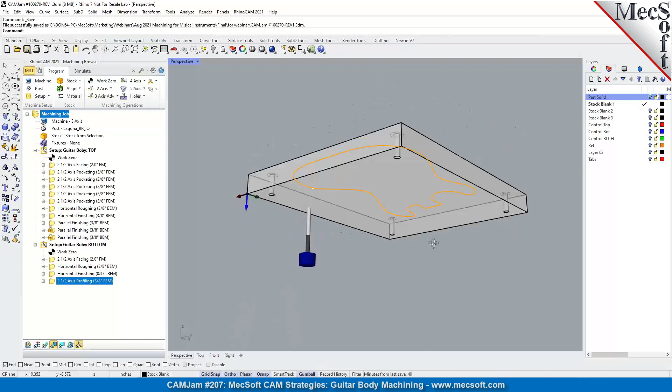So obviously we have a stock blank that doesn't have, it's just a square blank, and obviously doing it this way, you're gonna be using up all of that stock, and you might want to use that stock for something else. So, of course, you would save it, but this is just one way to do it.

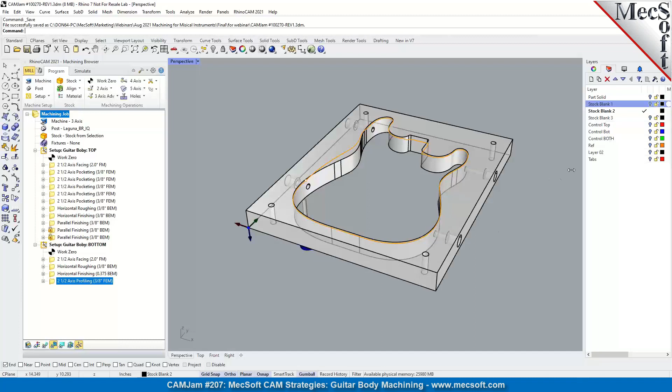With the locating pins diagonally to flip the part from top to bottom, this is just another way you could do it. If you just want to machine the blanks and locate the blank, you can use a frame type fixture to insert your blank, position it, and turn on your vacuum board. Then you can pop this frame up and you're ready to go. And then also, obviously, just a blank of the guitar body itself.

Okay, so let's get these parts turned back on here so we can start talking about the control geometry. So basically on the left, we got two setups. We got the setup for the top and a setup for the bottom.

So for the top setup, we're starting out with a facing operation. So basically for facing, if we go and look at this from a multiple viewport layout, the facing operation uses there's a contour perimeter curve around the guitar body. This is the exact shape of the guitar.

We'll be using this for finishing, and also for side 2, we're going to be using this for your profiling to actually complete the machining and separate. If you're using a square blank, it'll release the guitar body from the blank. That's our last operation on side 2.

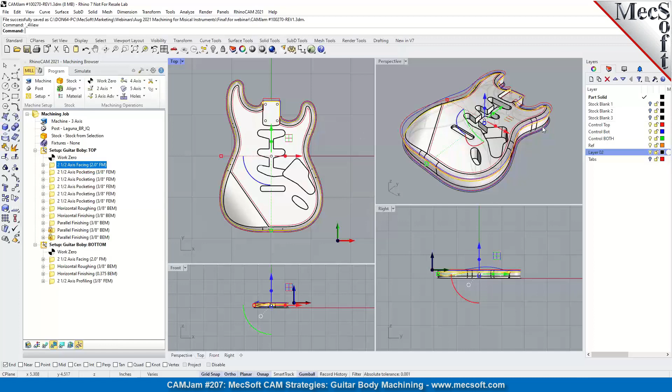Let's go ahead to look at some of the pocketing operations. Can you turn on the toolpath? Yeah, so we can see the toolpath. So there's our facing.

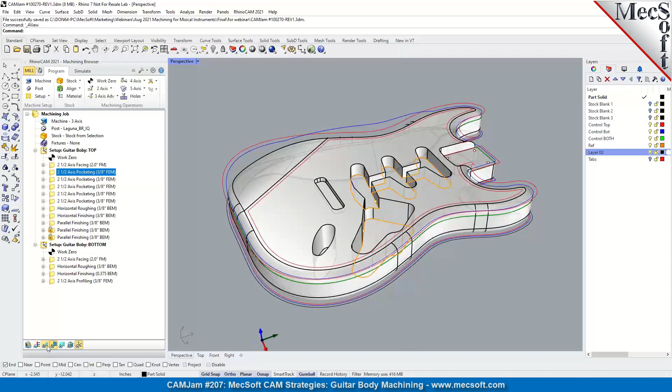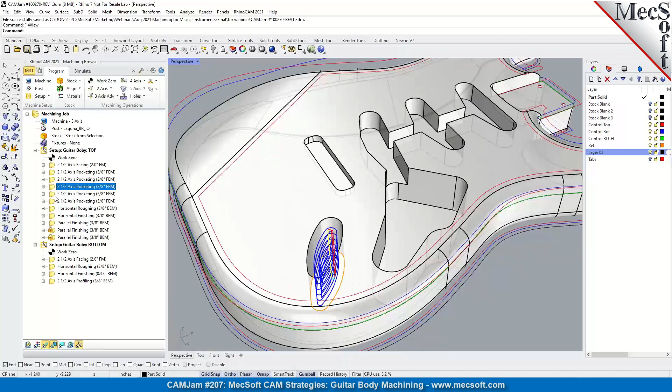Let's go ahead, we got a number of pocketing operations that use flat areas at the bottom of the pockets as the control geometry. And then some more pockets here, different levels of pockets. Another pocket here and here. And obviously the neck pocket there.

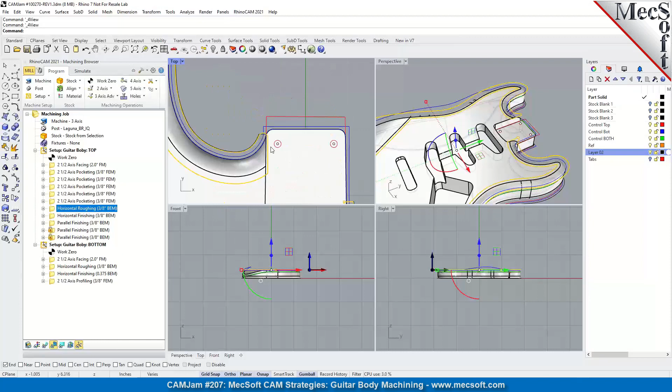Now roughing. Basically, you would use these two contours right here for the roughing operation. So it's just going to rough between these two areas right here. So the roughing the perimeter fillets, and also this contoured area here, and also around filleting around this edge.

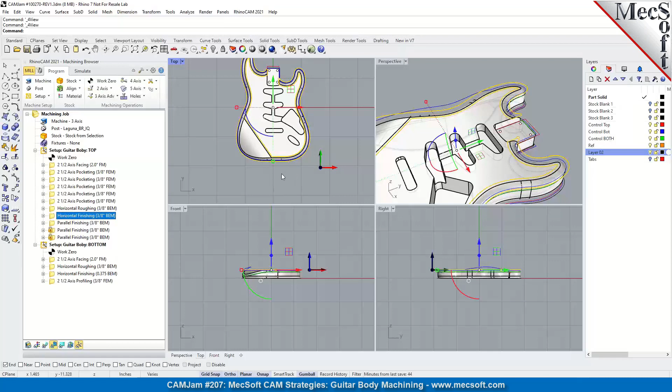So Don, there was a question about how did we create these boundaries? Okay, so let's just look at the control boundaries for the top. Basically, what we have here is the way to create these is a number of different ways. Obviously, you're going to use your part geometry, and Rhino has many different curve creation commands. You can create a silhouette around the part or a contour around the part to create a curve, and then that curve is either offset outward or offset inward to create a region between the two.

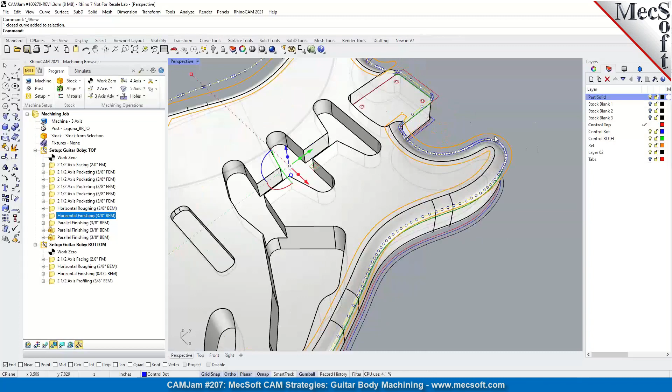So we're using a number of offset curves. Here's the perimeter curve, and then we're offsetting that outward on this side and on the inside as well. And there may be areas where you're going to have to tie it off to form a closed loop, because you do have to have a closed loop if you're going to contain your 3-axis operations. It has to be closed. So we tie it off on this end and just tie it off on that end.

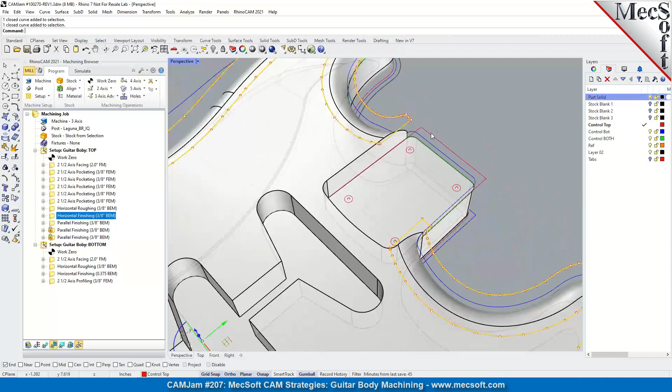So I guess the message to our listeners is that once you get the model of your 3D model of your guitar body, there is some additional construction you'll have to go through and create these boundaries to contain your machining, so you can do that in a very optimized manner, as Don is showing here.

Yeah, so you don't want to machine everything. If you don't have to machine everything, you don't want to remachine what you've already machined. So the control geometry is going to help guide the cutter to machine only the areas that are pertinent to that particular operation.

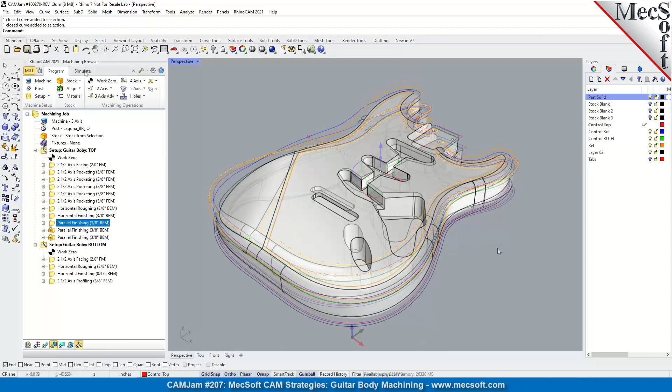For finishing, basically, we're using the same control boundaries here, where we're finishing just the fillet and the fillet on this side, and then this contour area here. So we got basically facing, a number of pocketing, a couple of roughing operations, and a parallel finishing operation. If you recall, I talked about the stock blanks.

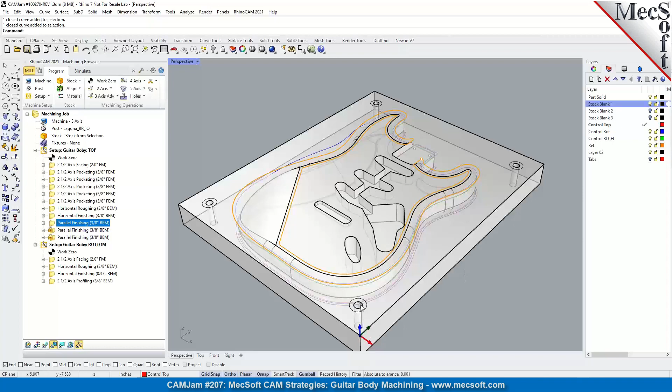This is sitting in a square blank that's already been machined. It's been squared up. It's got locating holes in the corners, and basically you only use two of the locating pins. You set up the one side. You can have a work zero. That work zero can be at the top, upper and outer quadrant of the stock, or at the bottom.

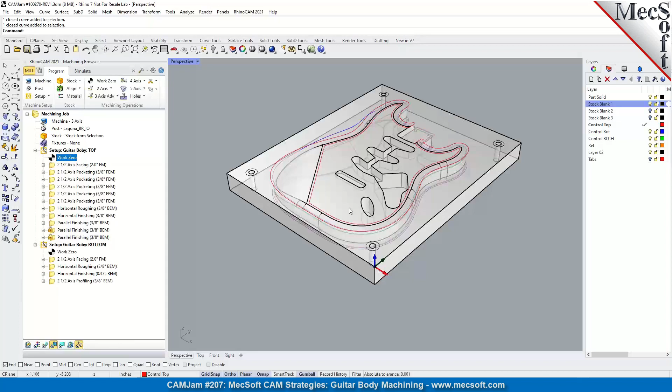Either way, it'll work. And the thing is about these two diagonal pins is that you set this up for the top side and set your machine zero. Then when you're done with that side, all you got to do is flip it over this way and machine the bottom. So let's go ahead and just flip that over. You'll see what I'm talking about.

So you just flip that over, and then for the bottom you'll use the same setup. You don't even have to set the machine zero again. It's the same location.

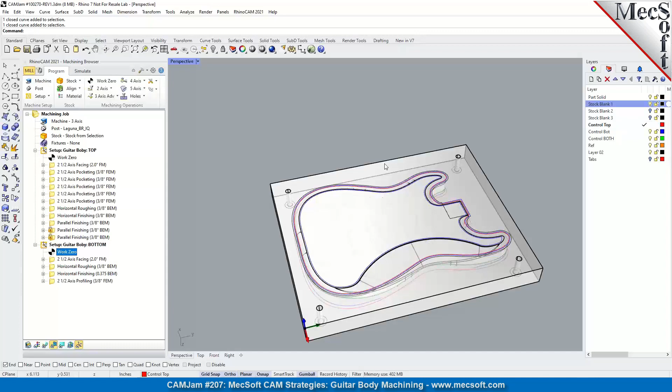Hey Don, before you jump into that, there was a question on those two locked operations you have. It might be a good segue into describing the functionality of locking operations. Yeah, okay, that's a good point.

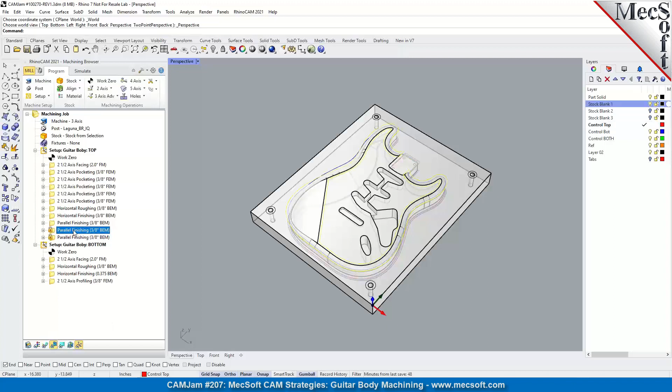Basically, you see the little lock on the operation. These are alternate methods of finishing that I used. Let's go ahead and turn this off, unsuppress it.

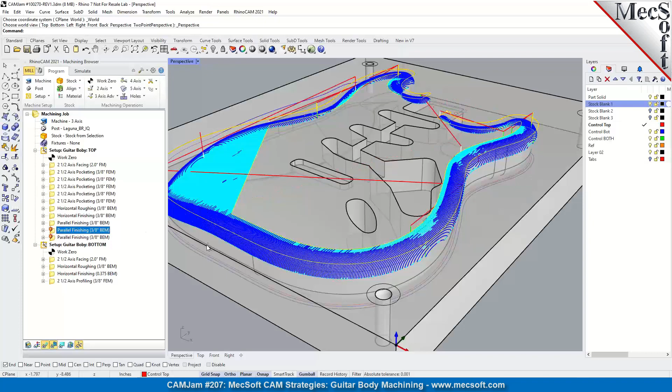There is one of the finishing operations I used for the top. It is a parallel finishing operation, and then also a second finishing. Let's unsuppress that. So basically these two finishings go in opposite directions along the X, and then also along the Y at 90 degrees to get maximum coverage for your surface finish.

The idea of these locked operations is that, like Don mentioned, these could be alternative ways of machining that you want to keep around for later use, or maybe even looking at it and using it later. But maybe you don't want to post these out. So if you select post all from the machining job, these locked operations will not be posted out, nor would they be simulated. They're basically there as archived operations that you can open up later and do whatever you want with them. Pretty nice functionality based on some of your user input.

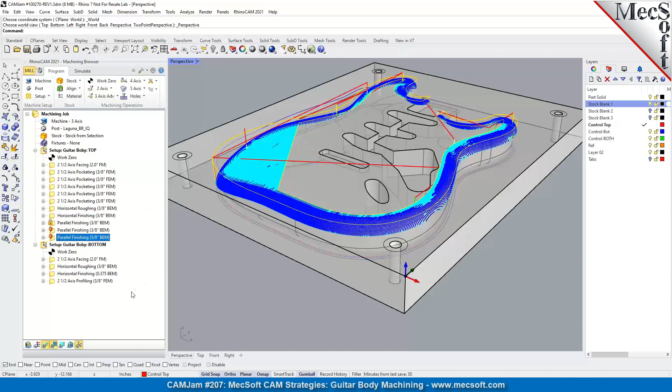Yep, and it's going to come in handy right now, because since I messed up my first finishing, I'm going to lock that and leave these other two turned on. I'm not going to generate them right now, but okay. So that is set up for the top.

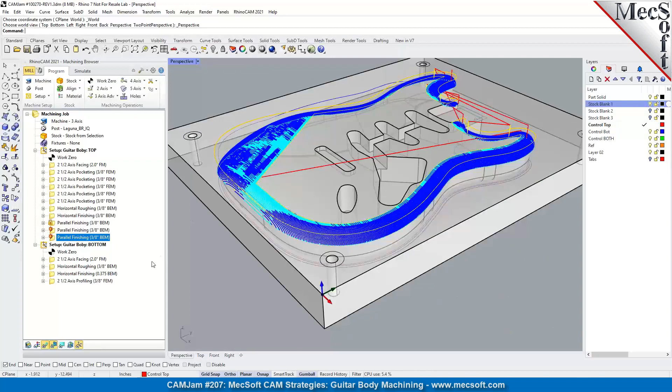Now, because you're using a square blank with diagonal locator pins, and the guitar body is in the center of the block, basically all you need to do is flip the part over, and we're going to go ahead and do that. Flip it over. And let's go ahead and turn this blank off.

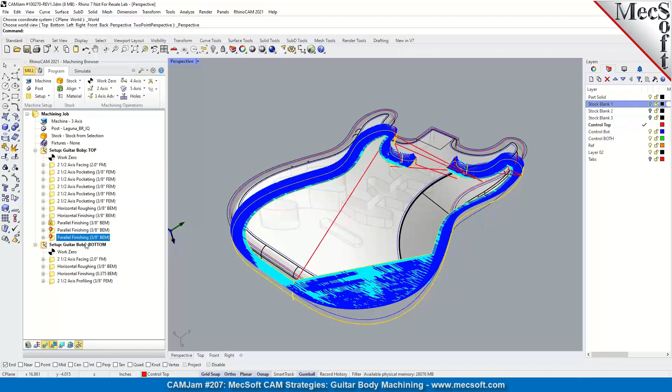When Don says flip the part over, he's really not physically flipping it. He's not doing a transformation of the part. All he's doing is rotating the view. In our CAM system, we can do a setup which basically reorients the tool axis as if you physically flip the part and machined from the other direction.

So it's pretty handy. This is available only in our Pro and Premium configurations, and also the 3+2 add-on module. If you wanted to add that, you would be able to get the additional setups and the ability to actually do flip machining. We actually did a webinar on that, I believe, two months ago. Yep, and if you're interested, you can view that on our YouTube channel.

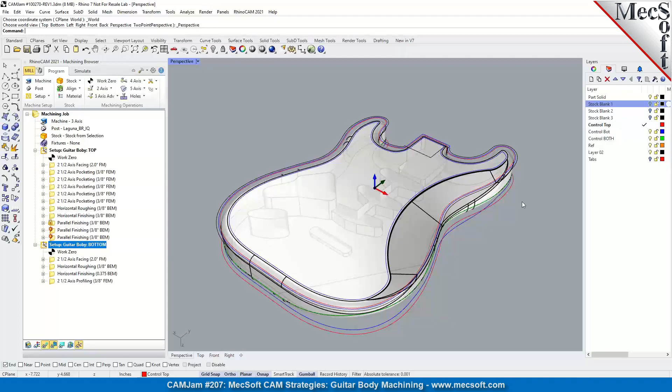Thanks, when I was talking about flipping, I was talking about the physical flipping of the stock blank on the table using the locator pins. Yeah, that is on the machine. I'm talking here on the CAD system, in Rhino. You're not physically flipping it. Exactly, you're just machining it from the other side, but on your machine, you're going to physically flip your stock.

And that's a good feature of the Pro configuration. If you only had the standard, then you would have to have separate CAD files for the top and for the bottom, and that can introduce a lot of inaccuracies from using two different part files, etc.

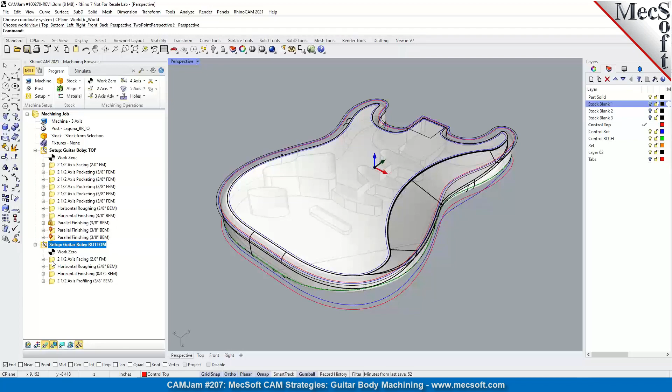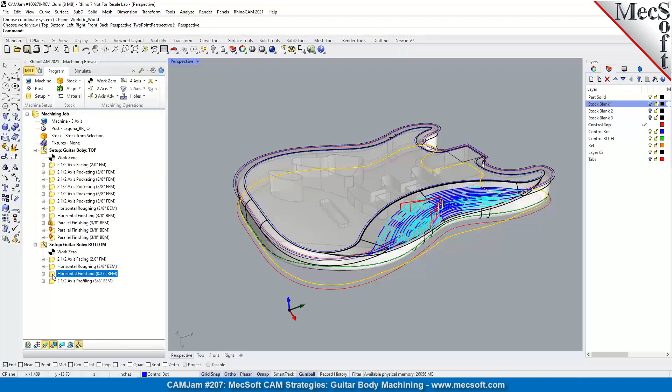So for the bottom, we're going to again do a facing operation for the bottom. And here is our roughing. We really only need to rough on this contoured area over here, so we got a roughing operation to get rid of some of that material over there. And then on the bottom part, we're going to use a horizontal finishing operation.

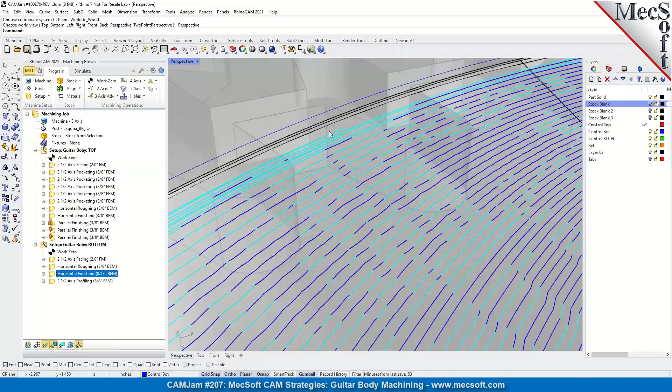Now, what we're doing here in the horizontal finishing is we're containing, we use the perimeter curve, so the entire guitar body is open for machining. But what we're doing is we're limiting the location of the operation in the Z-axis. So we're saying we're going to go up to the very edge and then stop, maybe 10, probably more than 10, probably 10 to 15 thousandths below the top face, so that only the contoured areas below the face inside of the perimeter will be machined.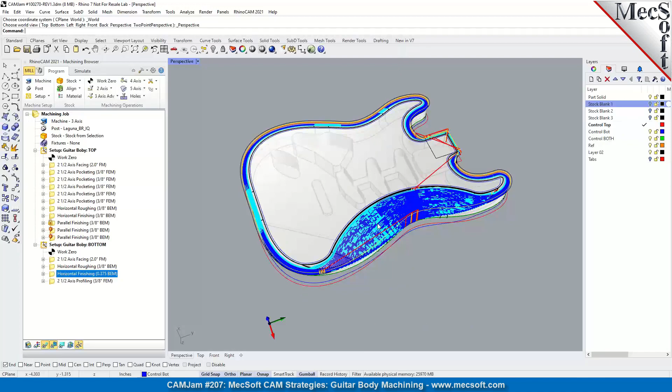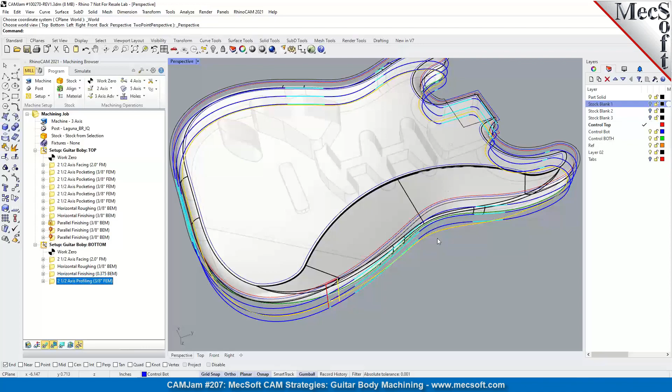So you see, just by using the outer perimeter and some Z containment, you can get your toolpath coverage in the exact location that you need it to be. So there's our horizontal finishing for the contoured areas. And then our last operation will free the part from the blank, and that is a 2.5 axis profiling operation.

If anybody has any questions about the guitar body blank machining, please type them in the questions box and we'll get right to them. I'm going to move over to the guitar body neck.

Hang on, Don, I think you should run the simulation there to show how that looks before you do that. Also, there was a question about Z containment. Let's go ahead and look at Z containment.

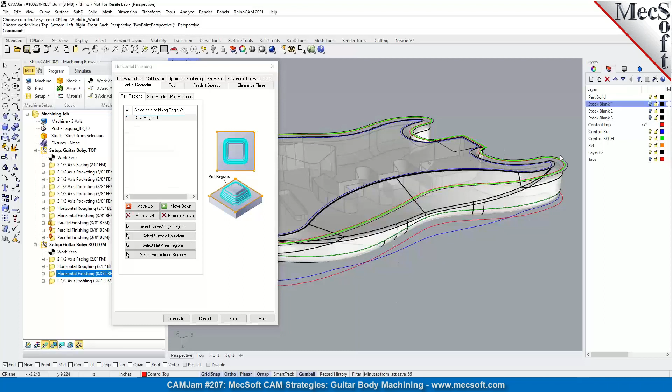Okay, let's look at the horizontal finishing operation. What I was referring to is that when you've got one drive region around the perimeter of the part, everything inside this perimeter is open to be machined. But we don't want to machine this top face because we already machined that, or it might have been pre-machined. So what you can do is go into the cut levels tab and set constraints on your cut levels. I've got the top T checkbox checked, so we're constraining the very top of the toolpath to -0.001, just a thousandth below the top face. That means it's not going to cut the top face, it's going to cut everything a thousandth below that out to the perimeter of the guitar body.

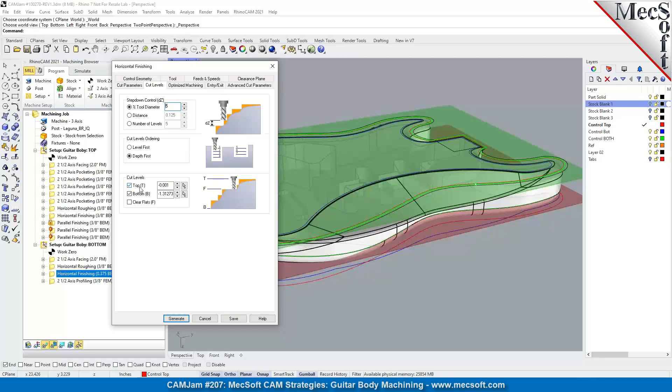And then we have a bottom B set, which just makes sure that the operation doesn't dip below our lowest fillet here. I hope that answers your question. And again, I was talking about the profiling. This operation, the last one you do, will free the part from the stock blank.

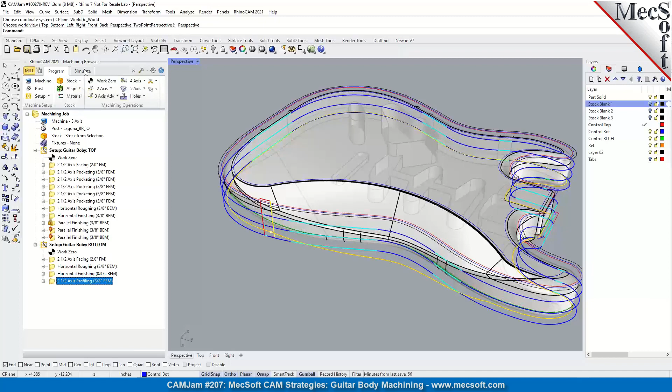Can you run the simulation now? Yep, actually I have it simulated, but we can go ahead and run it. Let's also turn the toolpaths off. Let's go to the top, and let's go ahead and simulate. Let's go just one at a time since they go pretty fast.

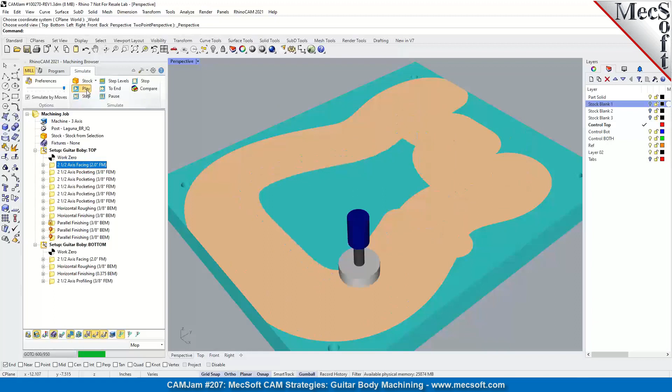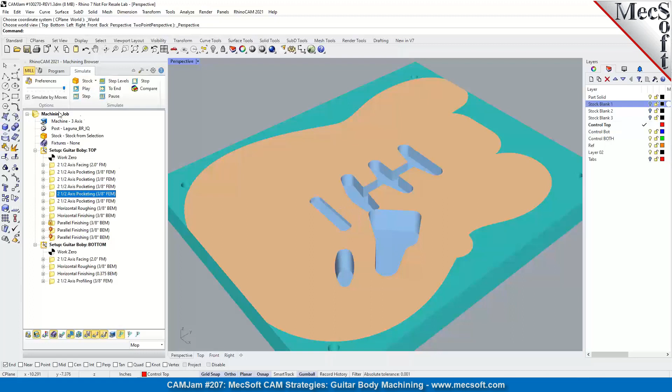So there's the facing, the pocketing, one of the pockets, and here is the second pocket to bring this pocket down deeper, and obviously our pocket there, and another pocket there as well. And for the neck, another pocket. So there's our 2.5 axis operations for the top side.

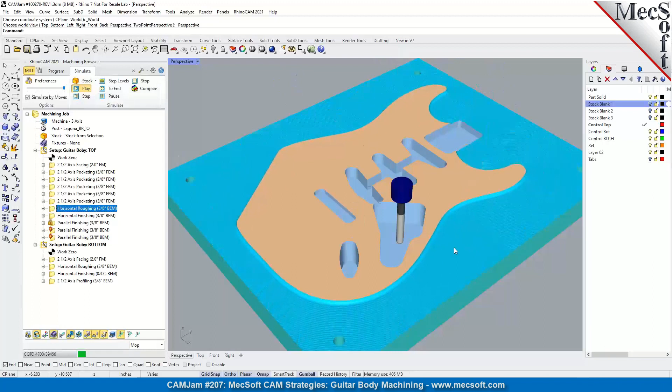And then we have our roughing operation. Again, it's not adhering to my control boundary. I'm not sure why. Let's pause that. Stop that.

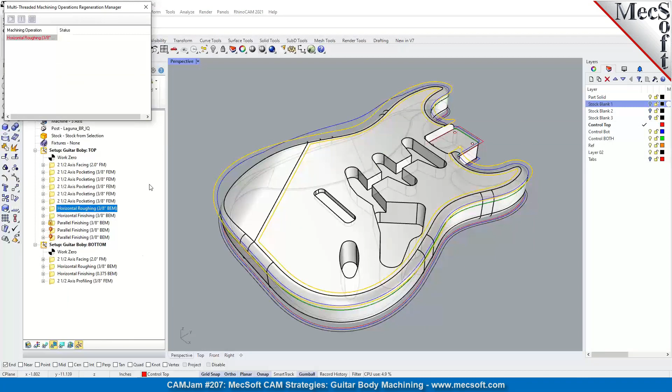Go back into that operation. Let's remove that, select that again. Generate. There we go. So we got roughing just around the fillets, a little bit of roughing, and over here in the contoured area. Let's go ahead and simulate that.

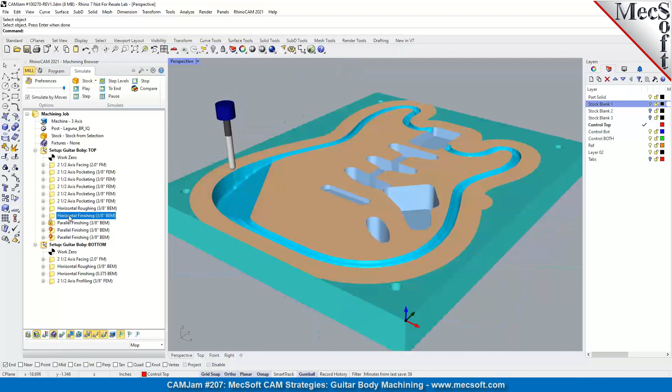So there's our roughing. Let's go ahead and do our horizontal finishing. And looks like I need to go ahead and reselect that as well. Remove that, we'll go ahead and reselect that. Generate it.

So what Don's doing is basically containing the horizontal finishing, or Z-level finishing, between those two curves, so he's not going on the outside of the part.

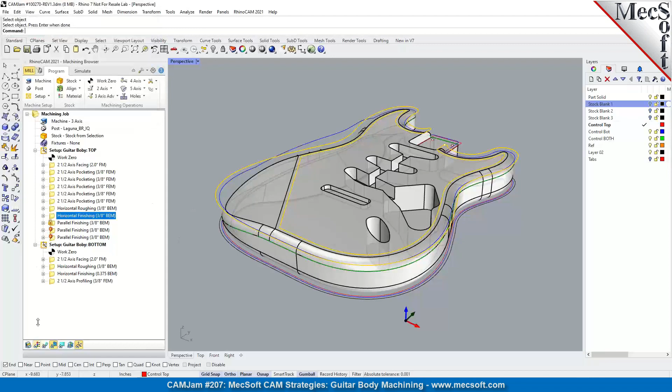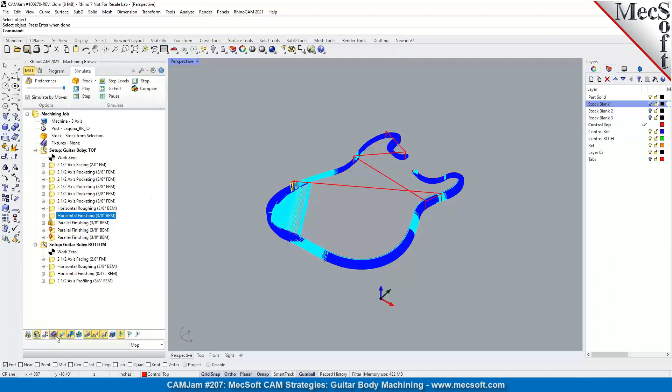And it does take a while. So there's our horizontal finishing, and I had an option turned on to follow the containment area. I can turn that off so it'll stop at the bottom. I don't want to regenerate it again since we got other parts we want to look at. So let's go ahead and take a look at the finishing at least in there. Let's go ahead and play that.

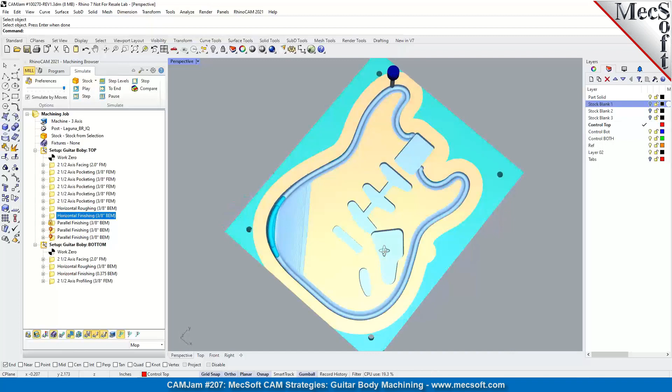Okay, so I got a couple of additional finishings here. Don, there was a question: are you machining it so it goes all the way down to the bottom of the stock, or are you stopping in the middle? Now for the parallel finishing, let's go ahead with the horizontal finishing. Let's go ahead and look at that.

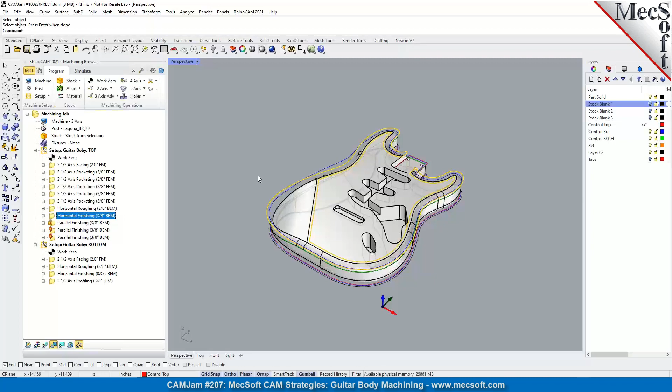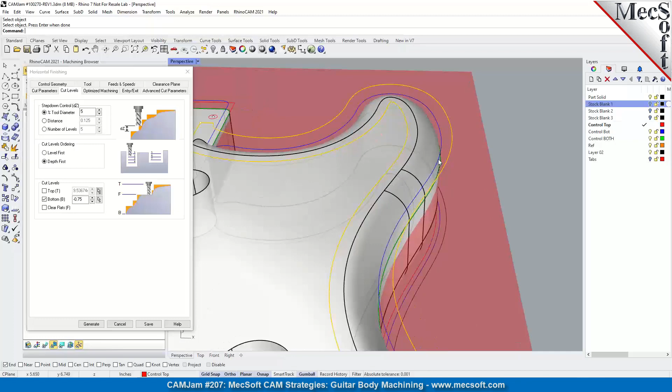We do have a bottom B set, okay? But because of the containment of this outer perimeter, the tool cannot go any further than the bottom fillet tangent. The tool is not going to go out even further than that, and it's not going to go down any further. Let's look at the toolpath again in that area. Again, it's only going down just slightly below the tangent area.

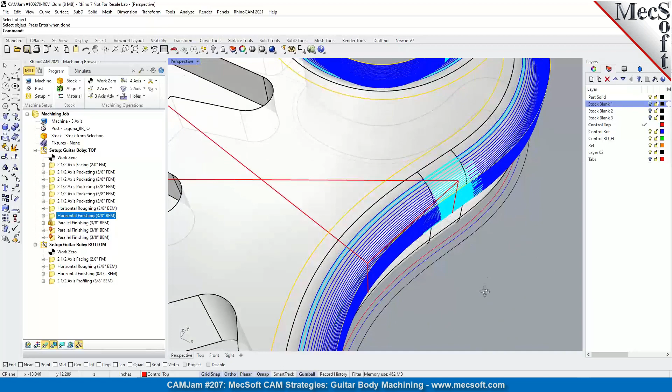It would be good if I regenerated that, but I'm going to leave that for now.

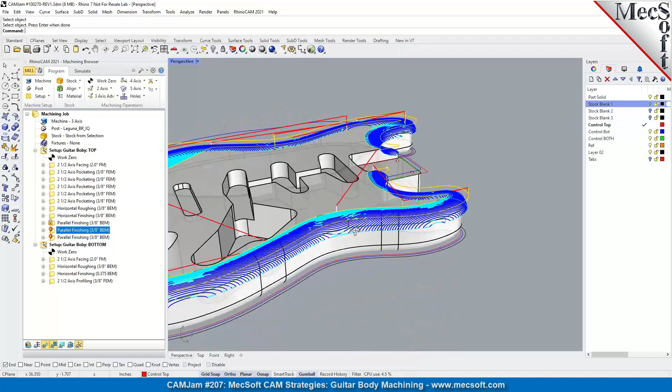So I think what Don has done—there's a good view of it right there—yeah, what Don's done here is he's taken that curve and offset it out by tool radius, so the tool's got just enough space to go to the edge of that body. And then he's also put a Z containment, so it stops at that Z level. And then when he flips it over, he's going to come back in with the profiling operation and clean the outsides. That works very well. Okay, let's take a look at...